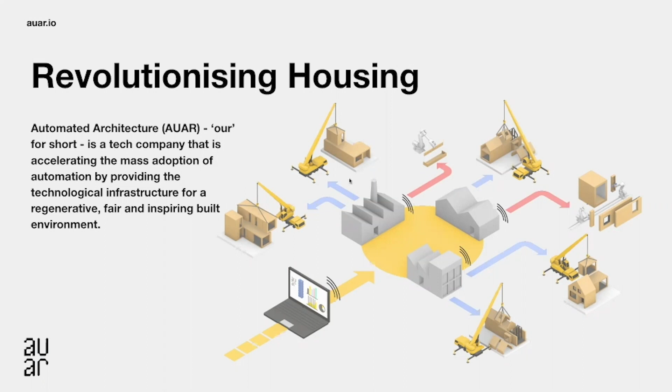Our team is comprised of myself and Gilles Retsin as co-founders of AUAR and of AUAR Labs, and we are supported by Ivo Tedbury, who's the ex-CEO of Sembler, a modular robotics startup, and Kevin Sai, who is our timber innovation modular systems expert, and he works across our technology stack at AUAR. And beyond us four, there are 6 other individuals that work with us: architects, engineers, developers, activists, and builders.

And sorry. So I'm just going back.

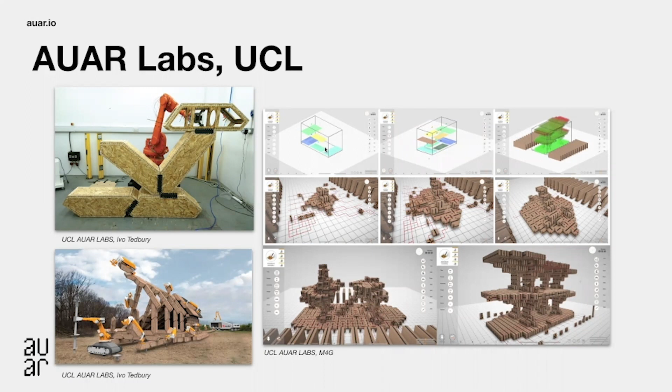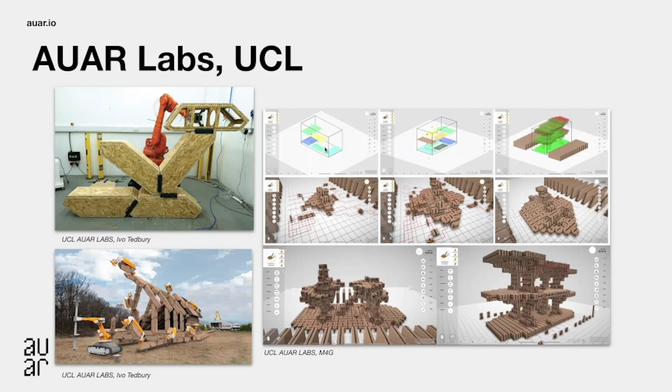So in our labs at UCL, we have explored for many years the intersection between design and manufacturing. We've done that both through speculative work around the way in which we can more closely bring together design techniques and simulations to design fabrication and robotics. We also have done this by testing. For example, in the lab, we have directly mirrored all of our simulation-based work and work with AI and used that as a way to analyze and understand how this can transcend into the building space.

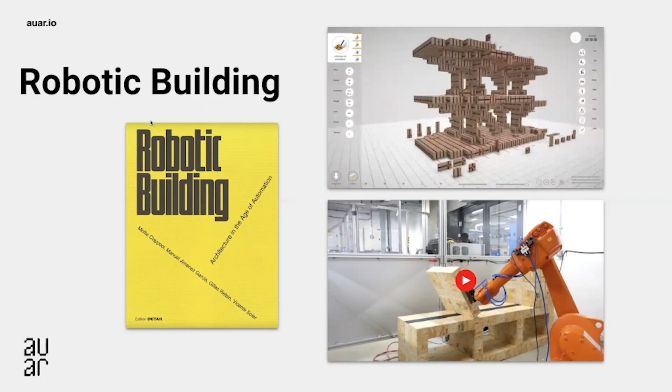We looked at this in more depth in our book, Robotic Building, which was published in 2019, and has sort of laid the groundwork, I would say, for our work in AUAR since then, really trying to understand how we can best use automated tools and technologies to further a mission that's really focused around more just built environments.

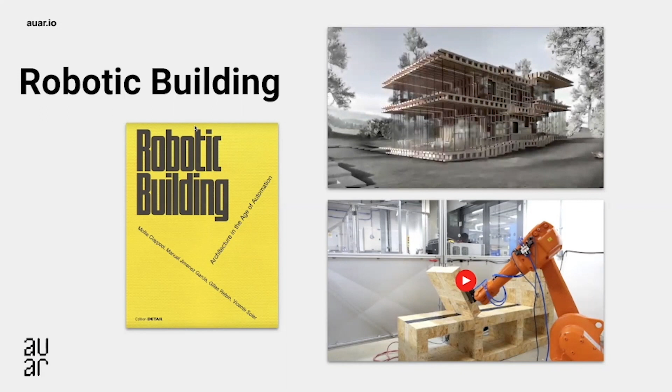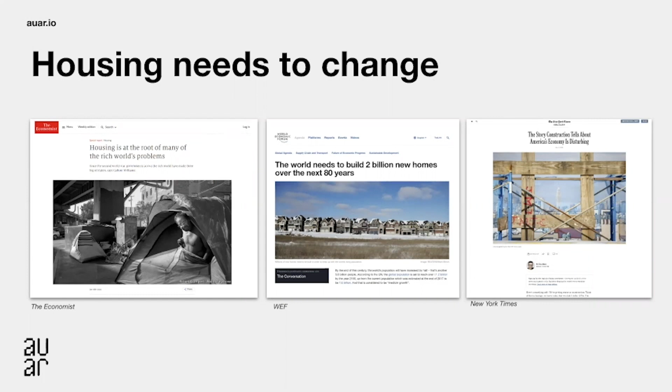So the baseline of our work is that housing needs to change. We know that we need to build many homes over the next 80 years, particularly in developing countries. But we also know that there's a very dangerous story being told around the housing crisis, in that we, as an industry in construction, are really unable to deliver on these needs because of intrinsic problems within the industry itself.

We put people on the moon, but we have really lacked the radical imagination that's needed to do things differently. And we believe that in order to change the way that we live, we need to be able to change the way that we build. This is really indicated by construction being one of the least automated industries in the world, and it has stagnated really since 1947 in terms of its productivity.

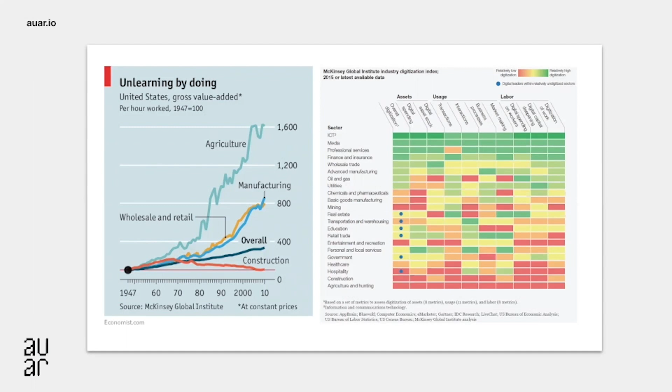When we look at some of the solutions that are out there, particularly in the construction startup space, we see that those solutions really mimic the existing supply chain. So there's a very fragmented approach to the way that a lot of these solutions are being implemented, because there's not a holistic view being taken of how we begin to address this problem. And we see also that attempts to solve it all by vertically integrating have also failed us for a long time and are continuing to fail us.

The very famous example in the US is Katerra, which was a SoftBank-backed startup that achieved unicorn status, took over $2 billion in investment, and filed for bankruptcy last year. And then, for example, a very famous business, Urban Splash, had a modular spinoff called House by Urban Splash, which fell into administration last year as well.

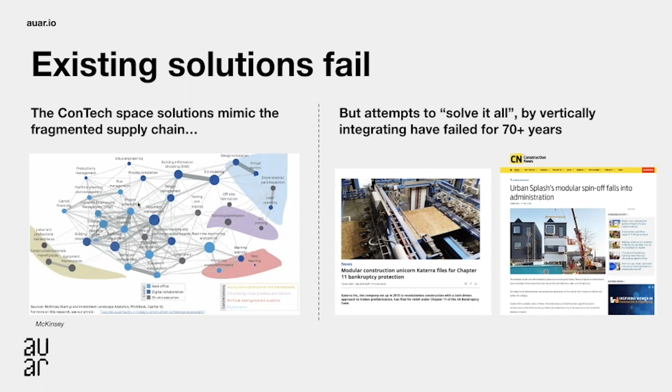So we see these kinds of crises happening when you start to try to vertically integrate and bring all of these things together under one umbrella. Actually, they're unable to do that because they're not integrating with some of the bigger questions in construction that we think we are able to address in our approach.

And we know that the building industry is really not like any other industry. We know, for example, that we are the only people that are making products that are always different, right? Housing, for example, is very localized. Building is localized.

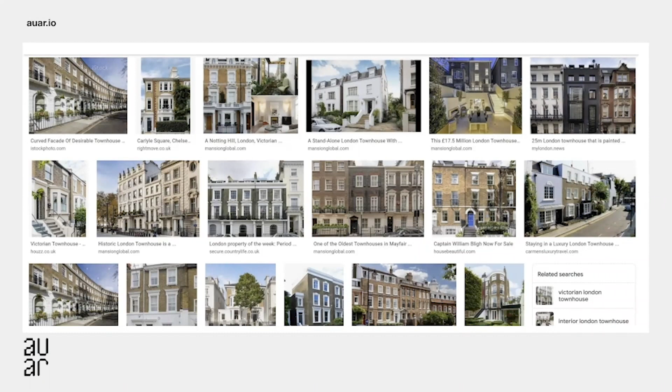So if a building is good, we've asked ourselves, why not repeat it 1,000 times? And we've seen this happen before, like for example, in London, the Victorian era, we see that townhouse typology being repeated everywhere. So why can't we think radically enough to be able to do this again? But a house is not a car, right? It's not a phone. It's not a product that needs to be the same and only have certain aspects of that object being customized, like its color or whatever.

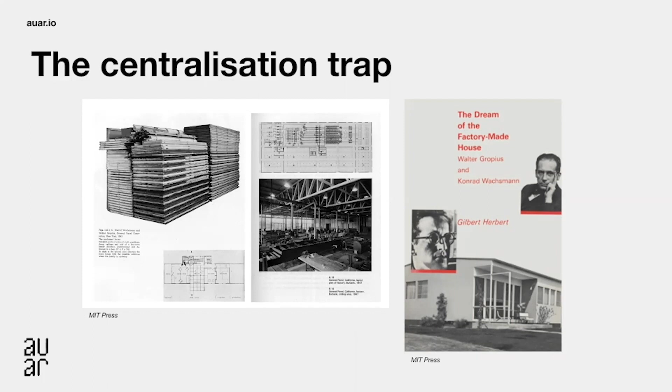And we also have fallen into a trap of centralization, that idea of vertical integration that I mentioned. You know, we know that one of the very first proposals around this was the idea of the factory-made house from Walter Gropius in the middle of the 20th century. And we see that centralization trap essentially mimics the existing industry averages. So for example, the industry average for a house is around 225,000 pounds.

And we see that the centralization trap that occurs really just increases the overheads by adding additional CapEx and only partially automates the design and engineering process as well as the labor process. And this means that other newer approaches that try to vertically integrate like Katerra, like Urban Splash, actually don't give any significant savings, both in terms of how that supply chain operates, but also in terms of costs.

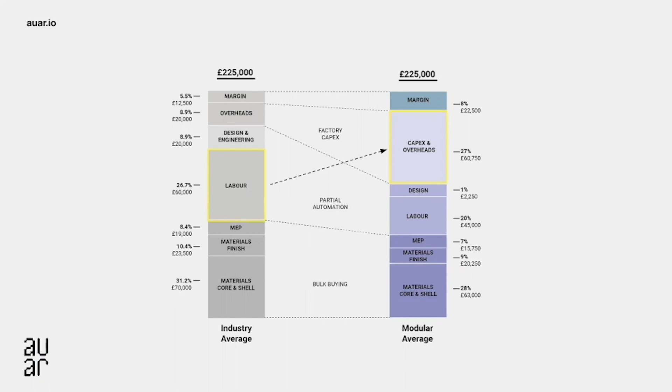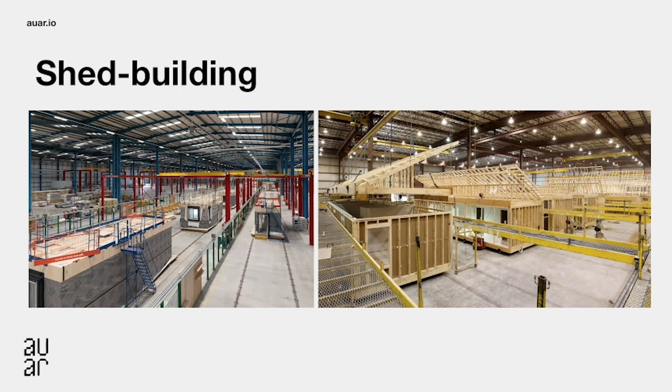Essentially, that labor, that big expensive chunk, just goes into CapEx and overheads. And these examples are essentially taking the construction industry and what happens on a building site and just putting them into a massive shed, right? And this means that all of those problems from the construction site still take place, but in that big shed. So where do we start in addressing this issue?

So in our approach, what we have done is we've looked at the value chain in the building industry and looked at the various stages of that value chain, from investment, development, design and engineering, manufacturing, construction, and maintenance. And we've looked at all of the other players and stakeholders that take on one of those various aspects in traditional industry. And then we've looked at some of the other modular builders like BoKlok, for example, which is a collaboration between Skanska, a global construction giant, and IKEA, or Legal and General, which also has a modular housing arm. Top Hat is another big name in the UK, and Katerra, which is now defunct. And we've seen that they actually try to take on too much of that value chain.

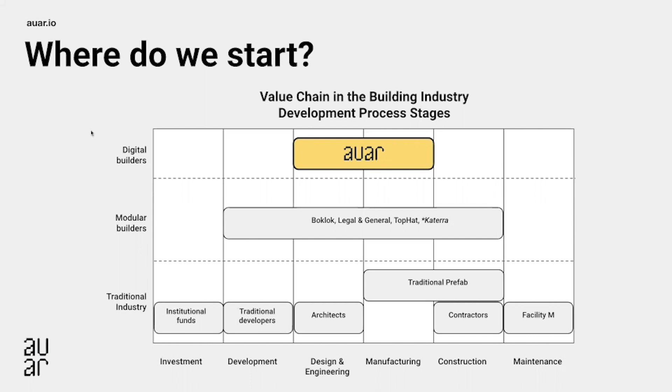So for us, we've really started as a digital builder in the design, engineering, and manufacturing space with the idea that that could have wide-ranging consequences for the rest of the value chain itself. So the building industry for us can't just be automated, because when we see that automation happening, it happens partially, it happens in a fragmented way, so it must entirely be reinvented.

So for digital builders like us, we've developed a repeatable but adaptable product. And that means that repetition enables us to have the basis for any automation, and that enables optimization and improvement over time. Adaptability is important because it allows us to adapt to different site constraints, different briefs, different regulations, and we can achieve difference in terms of adaptation at no extra cost. And we're developing a product because if it's so good, it needs to be repeated.

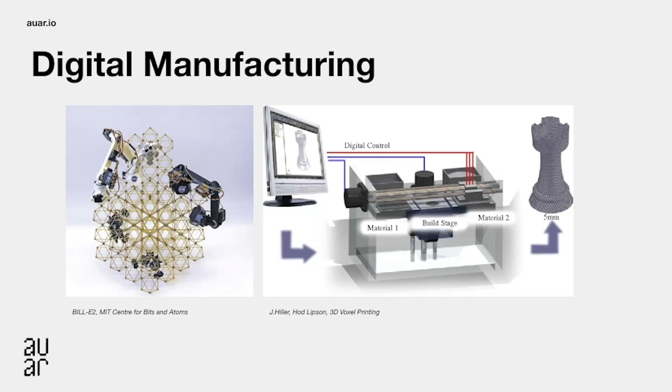One of the backgrounds here is thinking from digital manufacturing, for example, and the idea of a discrete element that comes out of MIT's Center for Bits and Atoms, where you have the same object being robotically manufactured over and over again to achieve many different varieties of ways of building different objects. So for example, for us, instead of thousands of parts that go into a building that mimic that existing supply chain, we've developed one building block that can be repeated in many different ways and allow for a great variety of adaptation or difference.

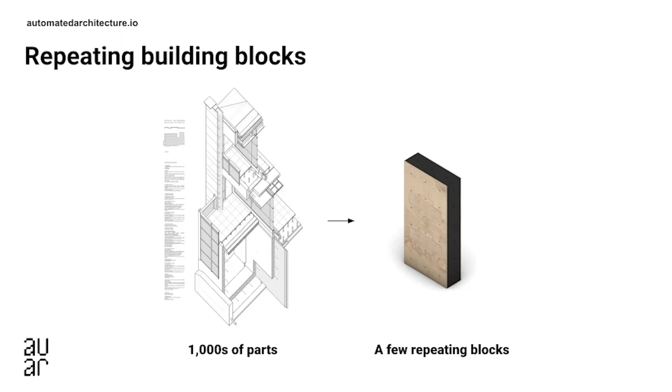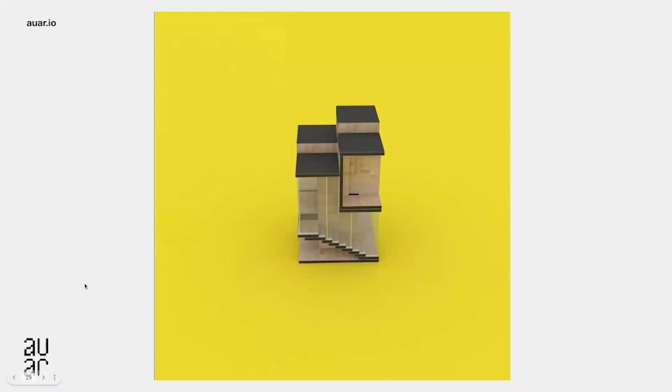This is where the discrete comes in and can be assembled together, as you can see here, in many different ways, allowing for different kinds of spatial typologies to emerge. And then also it enables us to really think about how that one block can not just be developed into one house, but also can provide the basis for lots of other different kinds of spaces to emerge out of it, or different kinds of interactions to happen with that building system for different uses.

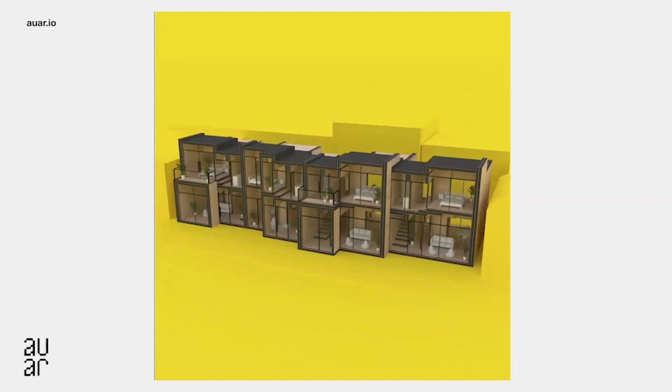And this is one GIF, for example, that we developed as part of a project in May 2021. I'll show it briefly towards the end of the presentation, where we see that we can actually engage this block to developing not just at the furniture scale, but also at a much larger scale as well for housing.

So in the company, we have, let's say, a 5-part element to what we're doing, and it's a circular process. So for example, we have a building system and a generator and digital supply chain model that feeds this process over and over again and really uses automation best to its ability, while also intersecting with known ways of working within the supply chain in terms of delivery. For example, in the way that buildings are assembled on site or in a factory kind of setup.

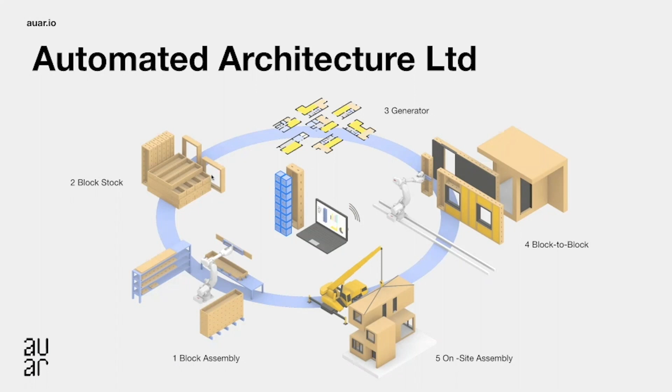And what this has enabled us to develop is a very local, low capital expense and low entry form of automation, where essentially you see our entire production line needing very few amounts of automation or different kinds of automation to be able to deliver any number of different kinds of homes. And this means that we can appeal to the building industry in a way that makes automation much more accessible to them, and thereby be able to work with many different stakeholders in that process rather than just one or two.

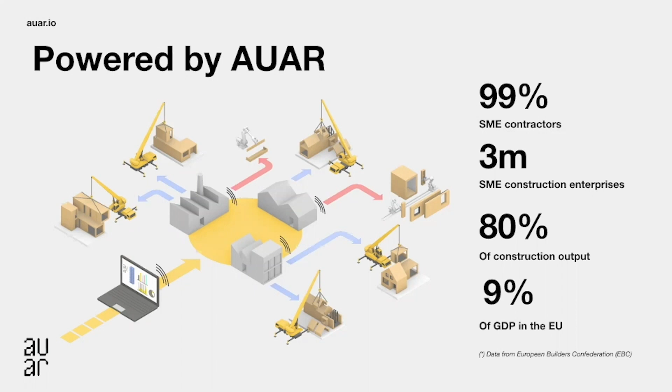So for example, what we have developed as an approach is that we essentially are powering an entire ecosystem of builders, particularly SME contractors, which make up in the UK and Europe 99% of all house builders. This means there's over 3 million SME construction enterprises with under 250 people, and the vast majority of those businesses are 1 to 2 people. They create 80% of all construction output, and in the EU, they comprise 9% of overall GDP, so this is a huge number of businesses that are very important in this industry that currently do not have access to automation, but they can gain access by working with our approach.

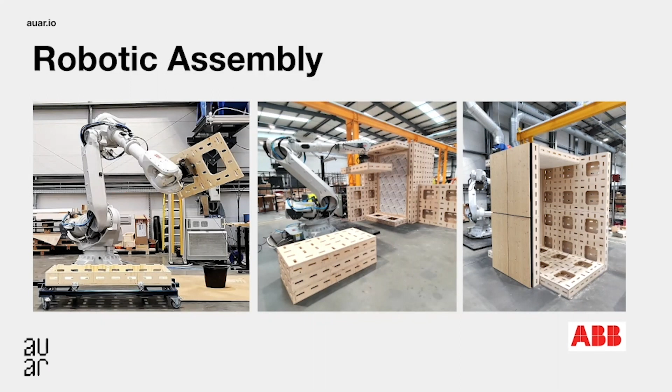This has also allowed us to go from robotic building to robotic assembly. So for example, we are able to use a very off-the-shelf industrial robotic arm, develop a modular, scalable and low-cost form of integration with that robotic arm that allows us to assemble our building blocks very quickly and then assemble them together to comprise different kinds of structures that then turn into homes. Our building system can be assembled in 45 seconds using our robotic platform.

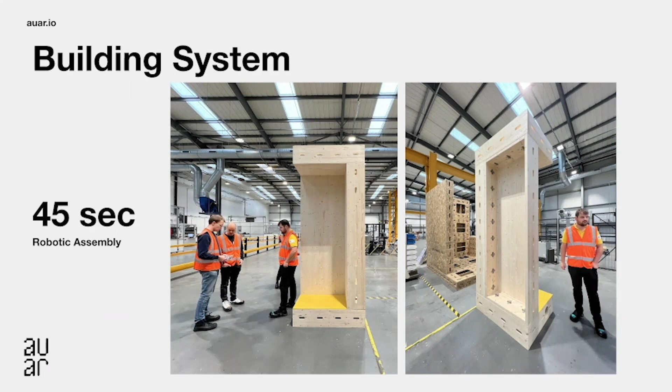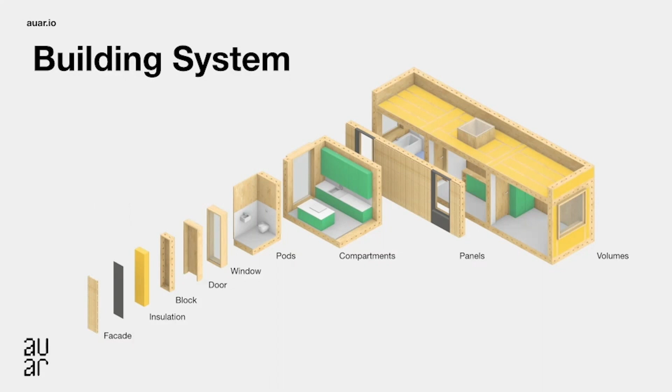This is an image of a couple of those building blocks combined together. This is a 2.7 meter tall unit that enables us to create an entire space. And this is the kind of integration that we're able to achieve. So for example, the block acts as a base unit for all aspects of, let's say, an entire volume. So it is integrated with the facade, but it also integrates the door, the window. It acts as the base for everything. It can make compartments, panels, and volumes, as well as all the integration with MEP and things like that that we need.

It also has provided us an opportunity to work with communities. So this is a really important part of onboarding stakeholders. So we've done a lot of work in the UK working very closely with communities to explore how automation can enable them to design and build their own homes and spaces. This project was Block West, which we did in 2020. There was an age group of 17 to 80 involved in the project, and it was 50% women and 50% men, which is obviously something that doesn't happen a lot within the construction industry, and is now really taking flight in the UK, with community-led housing groups that are using our tools and our approach to deliver houses locally.

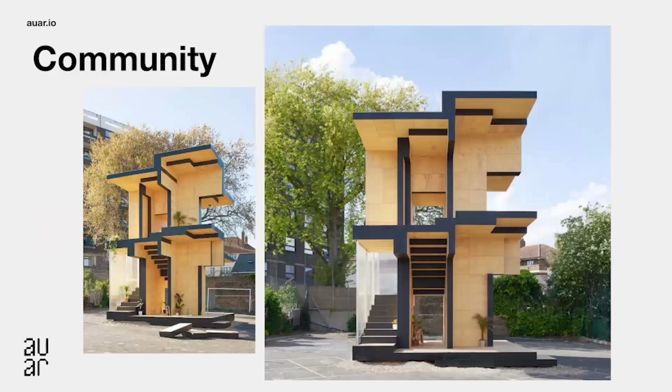We also did this in May 2021 with Hackney Council, which is a very large local government in East London, where we worked with local residents and community members, as well as policymakers and cultural institutions in that neighborhood, to design, build, deliver, and publicly program this project House Block, which acted as a kind of scaffolding for activity to engage the community.

So the project itself wasn't just an object that we built and then said, hey, look at this amazing thing, what do you think about it? We engaged people in a paid program of training and work experience in the design, construction, disassembly, and its activation as a public space, as a platform for these discussions to happen, as well as skills building and other forms of learning.

Just before COVID, we also built our very first office and residency space, which was an open space in the building center in central London. It acted as a co-working hub for over 6 weeks. And we were able to really explore the potential of how this kind of open-ended space could be used and also activated by the public.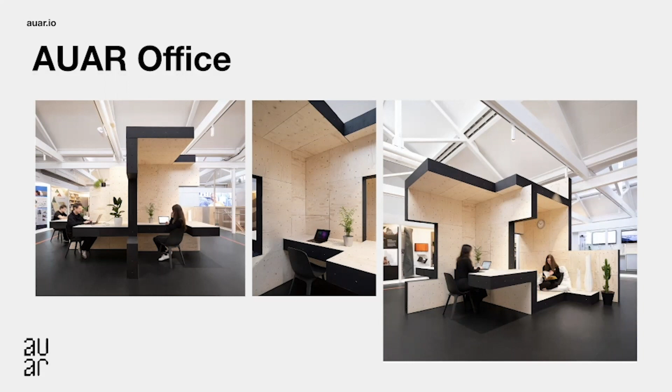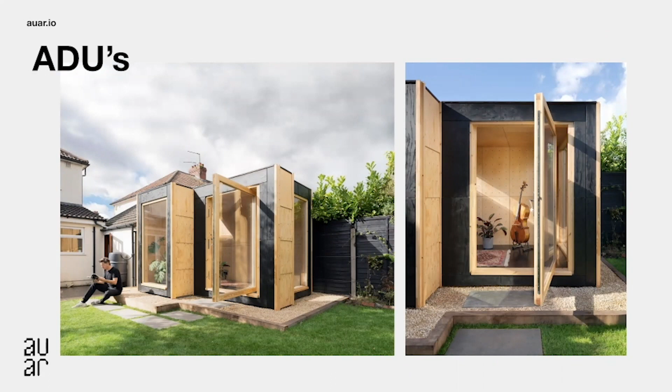Since then, we've built a number of different ADUs where we've been able to train ourselves, train our teams, train our robots, and really begin to understand how we could take away some of the pain of the contractors that ultimately we want to be working with our technologies. These were very fast-paced projects, and we learned a lot during this time. We're now starting to move away from this, but they're there, they're being lived in, they're being used on a daily basis, which we're really excited about.

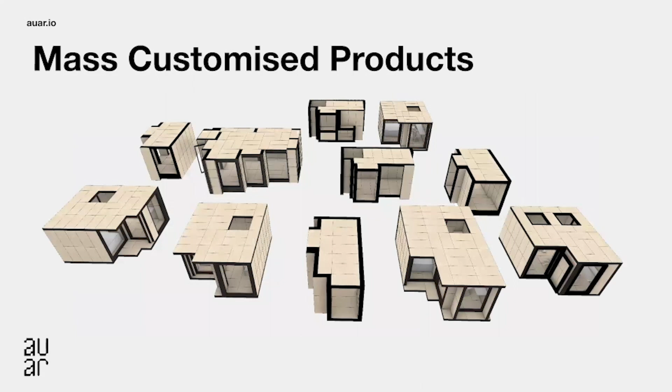So this moment for us was really big. It gave us this huge opportunity and platform to demonstrate what was really possible when you embed robotics in the production chain of how we design and deliver homes. And really, these are mass customized products. The mass customization trend of the early 90s and early 2000s really set a problem to the industry and to architecture, where it said that in order to get mass customization, you have to post-rationalize after the design phase in order for things to get built. And that really created a massive gap and increased the time and budgets of these projects.

So for us, we're looking at how can you get a standardized product that allows customization, and we've built or are building all of these small projects either last year or this year. And they're all exactly the same in a way, but they're all very different in terms of their use, their spatial arrangement and typology, and also their atmospheric qualities.

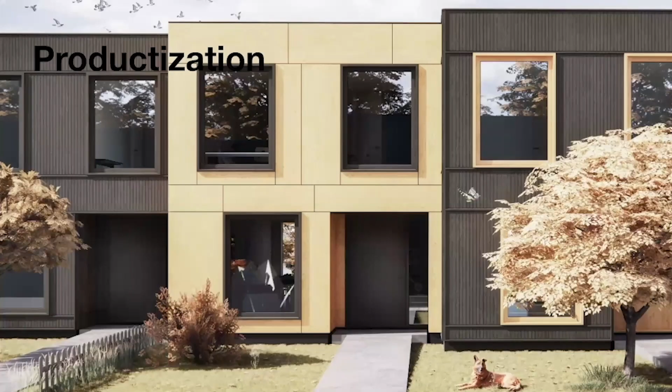We're now shifting again towards this notion of productization. We know that we have to make spaces that are incredible for people to live in. So we've developed a default house type that we launched actually yesterday at the Industrialized Construction Forum at Stanford, which is a house that can be adjusted to various different building regulation environments or contexts or sites, but without changing the design or manufacturing process that we use. So that means we can adapt to many different kinds of places without having to add additional cost or time. And it's beautiful, right? We can all agree. At least I probably want to live in one of these.

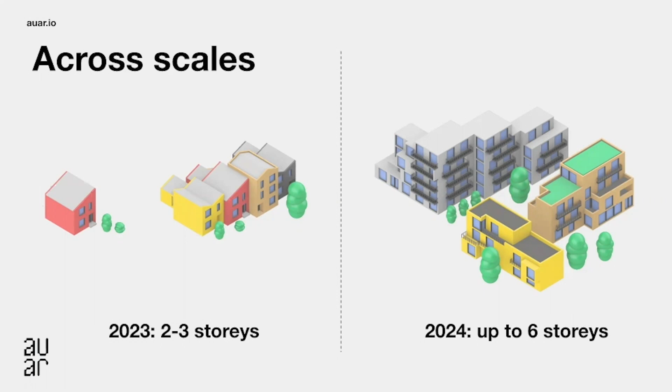So right now we're working across 2 to 3 stories, delivering houses in the UK and EU. And this is really a series of pilot projects that unlocks from 2024 onwards up to 6 stories of housing, which is really the sweet spot when you want to think about densifying cities or neighborhoods over the next 30 years to deal with issues around climate change in particular. So for example, this is one image that we created of what a community based on our building system might potentially look like when you have different densities and different house types developed there.

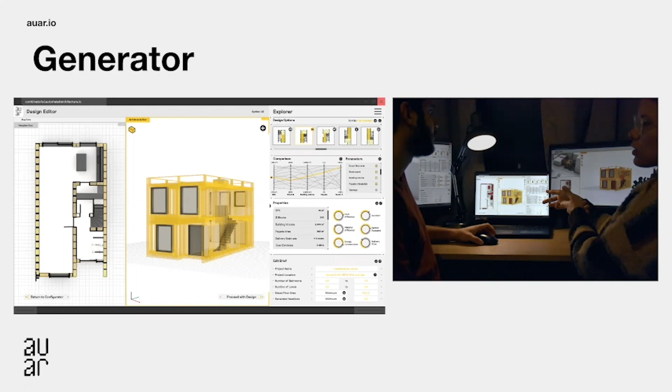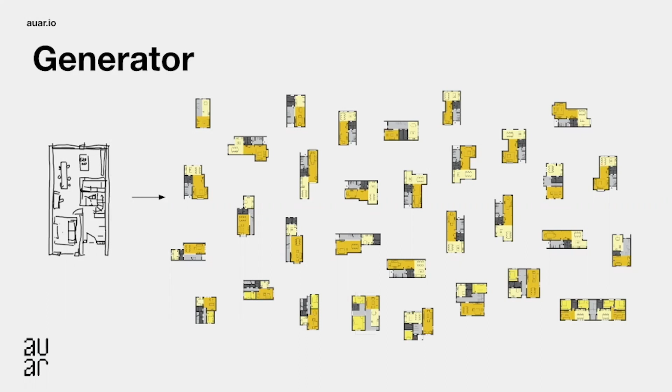So instead of developing a design platform that is, let's say, configuring known designs, we're working with the idea of the generator. This generator can take any kind of plan and generates what we call a block model from it. And then that block model gives us various different options in terms of what it might need in terms of customization, and that customization is automatically generated. It also automatically gives us all of the information that we need about a singular project. And that means that we can give very clear, automated and accurate costings and timelines for the projects that we're delivering. So this is kind of the dream scenario, which we're working on right now, where essentially you can take any sketch and generate various degrees of options automatically with our software platform.

So for example, these automations are very easy to quantify, because we have only one building block that we need to know everything about. So because we only have one building block, we're able to know all of the materials attached to that. We only have about 20 materials that we use to do one house. And we're able to control all of the robotic integration with it as well, which is a really interesting moment, we think, in simplifying and making an ultra short design and production chain.

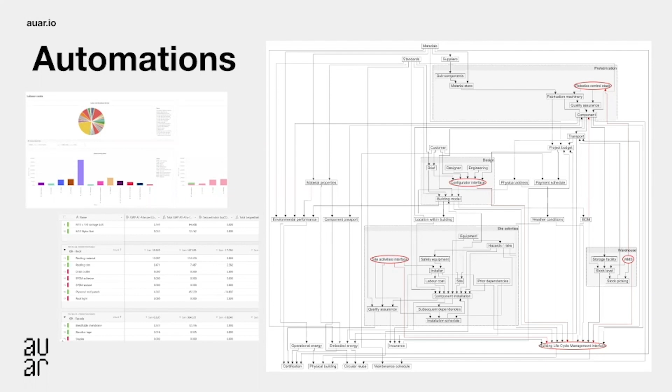We're also working on automations, very practical automations as part of this, in the form of apps. So this is one that we use with our more casual labor that we hire onto our projects in terms of delivery, where we have developed a tool that allows them to very quickly see all of the risks with a task that they need to do. It allows them to have access to all of the diagrams or images or plans that they need in order to do the assembly on site.

And it also allows us to track how they are finding the tasks that they're doing, and also provide us with feedback so that we can improve on our processes iteratively and not lose any of the knowledge that's created in one project once that project is finished.

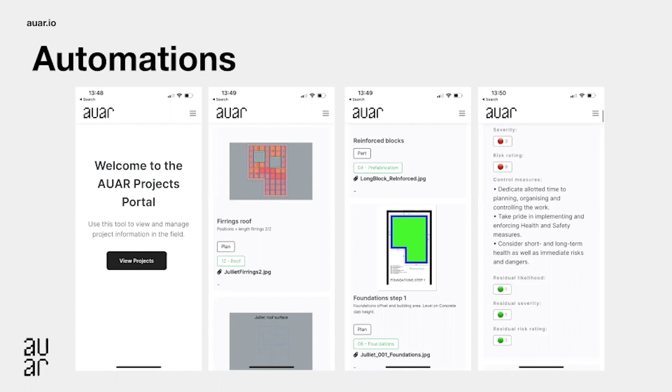So this all comes together in what we're calling a Microfactory platform, which is a very low capital expense platform. Our closest competitor is Cuby Technologies. Their Microfactory platform costs between £5 to £7 million. Ours costs between £300,000 and £700,000, which is a significant cost reduction in terms of having that low threshold access to automation. And it's modular.

So essentially, if you have an area where you need to develop homes where the numbers are bigger, you can just copy and paste and modularize the factory so that it can have a greater capacity. And because it is also modular, if, for example, you set up an area where you have 200 or 300 homes and that project's finished, we can very easily take down that factory, absorb it back into our network, and set up again in another location and expand the setup somewhere else where it's most needed.

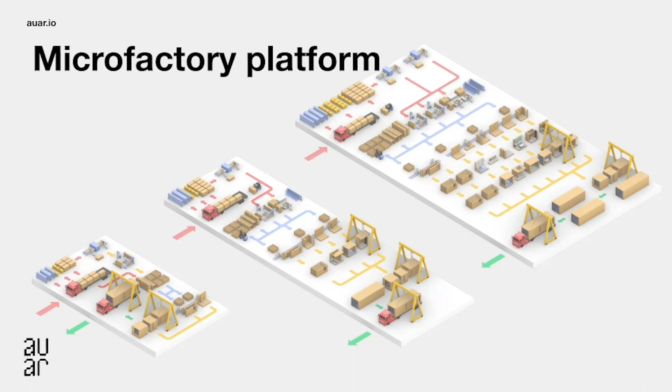It also allows us to do what we call parallelisation. So in a typical factory setup, you have the Ford model of the assembly line, where you have very codependent processes. So you can't move on to the next stage until you finish the first stage. And this creates a really difficult thing if, for example, one part of that chain doesn't get completed, right? It can really impact on the overall performance of the factory itself.

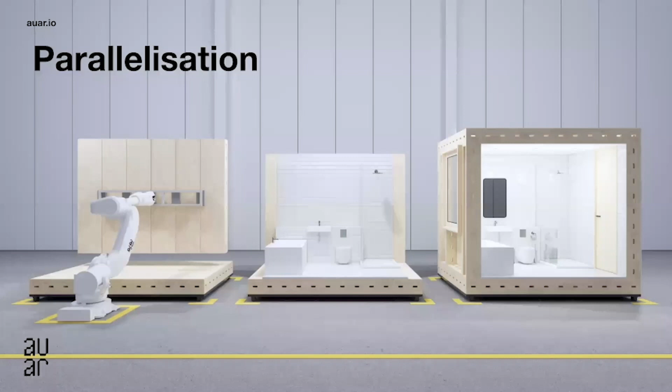So instead we have several different processes that can take place in parallel. So one robot can be assembling blocks, one can be assembling a bathroom pod unit, one can be assembling walls, one can be assembling the full volume. And no part of that is dependent on another part having taken place. So we design our projects with that in mind, and we can automate our supply chain really easily because of this. As you can see here, you can have these kind of 3 different stages. This is just a bathroom pod being finished.

This is our microfactory space that we're setting up currently in East London. We had been working for the last 18 months at ABB Robotics UK headquarters, where we were the only startup that had a robot cell in their innovation center. And we're now transferring that setup to our space in East London, where we'll be delivering a whole huge pipeline of projects in 2023, 2024.

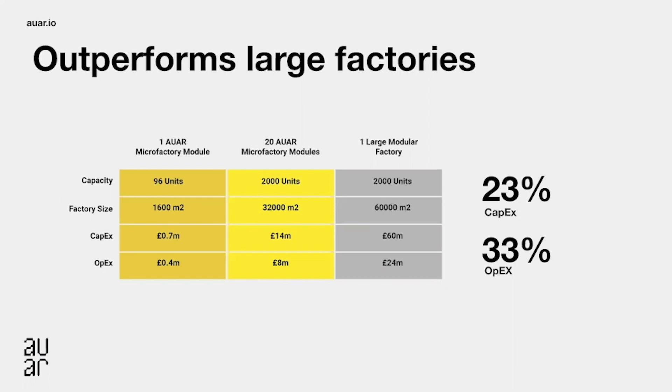It also has this kind of impact. You'll remember from earlier on my diagrams around the industry average and modular average. So with us, we're able to shift the amount of labor into CapEx and automation, and then increase the amount of margin that our contracting partners and delivery partners get, while also reducing costs significantly.

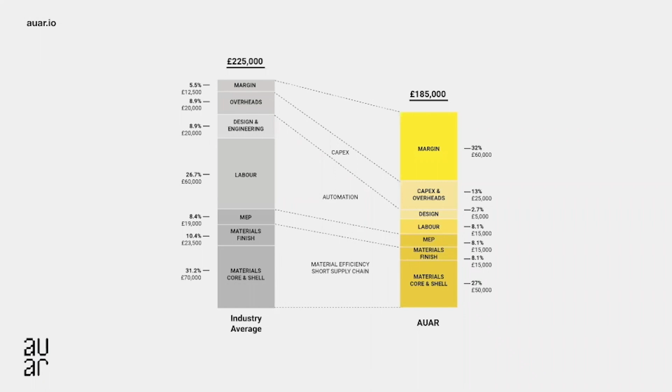This also has a big impact in terms of build time. The industry average for a house is about 36 weeks. We're able to go from design to site install within 6 weeks. In terms of energy costs per year, this is also hugely significant: because our building system already meets passive house accreditations, we're able to have significant savings in heating costs, which is obviously a really big topic right now in the UK, where we have an energy crisis and costs are extremely high.

And it also has a big impact in terms of carbon emissions. So each individual house, instead of creating 100 tons of CO2, has -12 tons of CO2 per house.

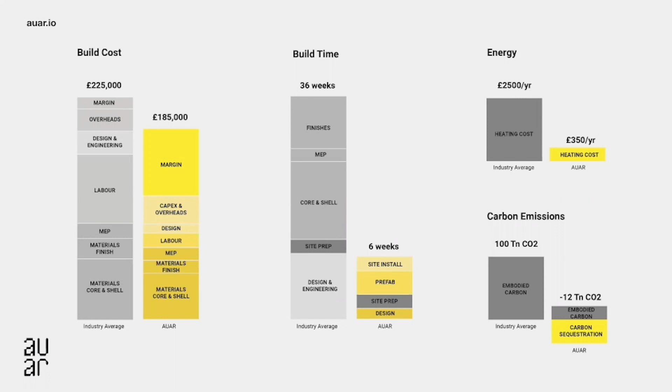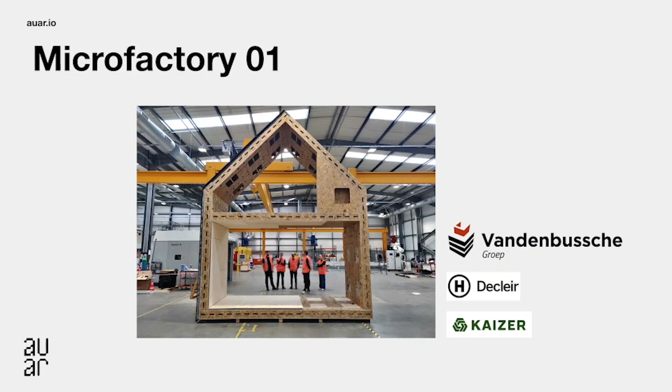So our first external microfactory, since we have our own in East London, we're setting up in parallel in Belgium, where we have a large pipeline with a large contracting partner with around a 250 million pound turnover called Vandenbussche. They do a lot of different things, but they also do their own housing development. And from that, we are onboarding 2 additional smaller contractors, such as Decleir and Kaizer, who are onboarding themselves as manufacturing and contracting partners, working with our building system and technology.

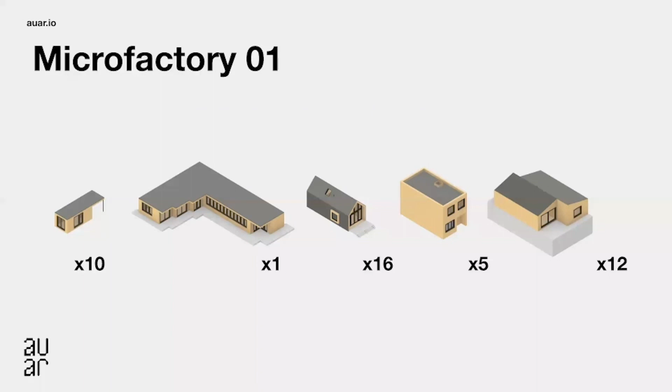This year, we have a really huge amount of projects. We're doing 10 small ADUs, 1 large test case villa, 16 small single family homes, 5 single family homes, and then 12 units, called uptopping in Belgium, which are essentially 12 units that go on top of an existing building that's being refurbished and retrofitted.

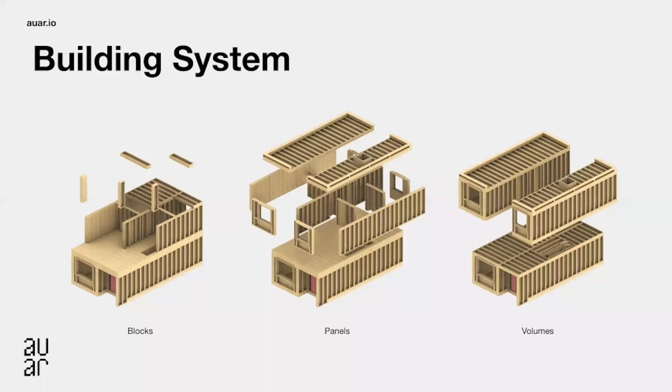Our building system is in a way agnostic to the way in which it's delivered. It can be delivered block by block, as panels, or as full volumes. This means that we can work across more different sites and site constraints than any other building system out there. And that has wide-ranging consequences for us to be able to work in many different regions at the same time. It allows the scalability that we need to deliver the kinds of homes we need globally.

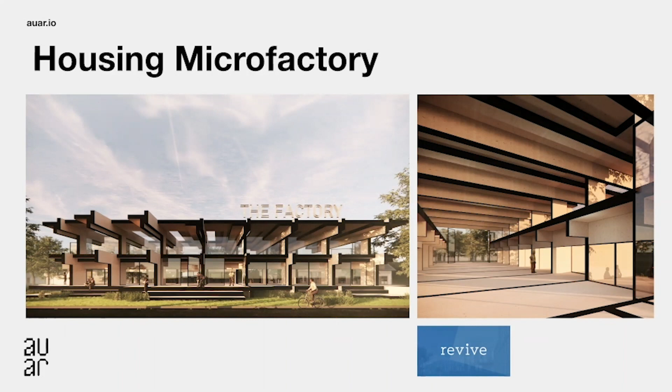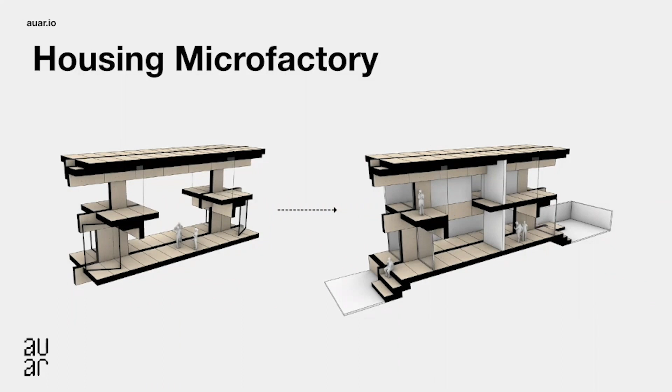And it's also allowed us to explore developing a typology for projects that first is a microfactory and then turns into housing. This is a project we're doing next year with Revive, one of the top 10 sustainable developers in Europe. They develop primarily on brownfield sites, where we have the microfactory setup that then delivers the homes itself. This is an example of how the factory then gets slightly retrofitted using the building system to turn into homes after the project is completed. Just a couple of images from that project.

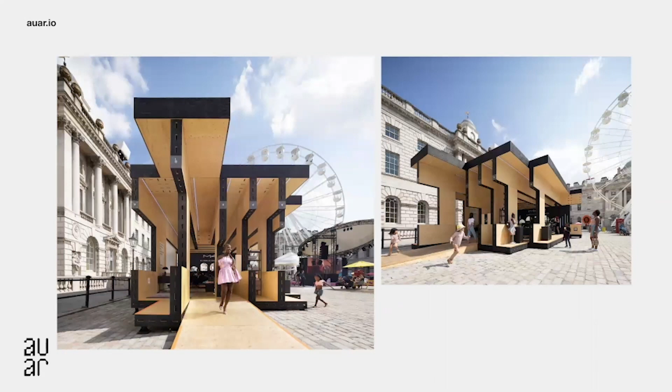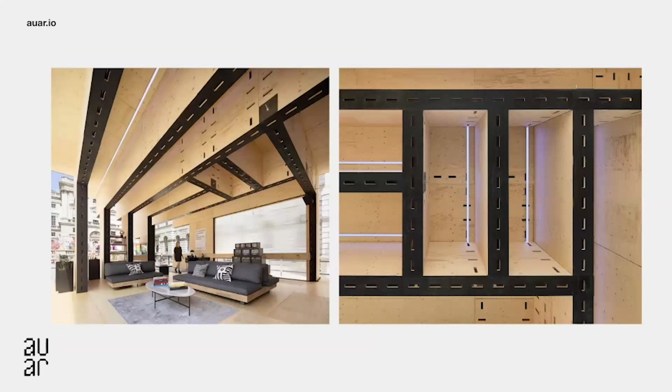And we're always testing this. For example, we built a small section of that microfactory earlier this year. This was a community-led project in central London, sponsored by the Mayor of London, at a cultural organization and arts institute called Somerset House. We tested out how we would build that section, and we use opportunities like this to further the practical R&D needed for large-scale projects further down the line. So that's an example of what that might look like.

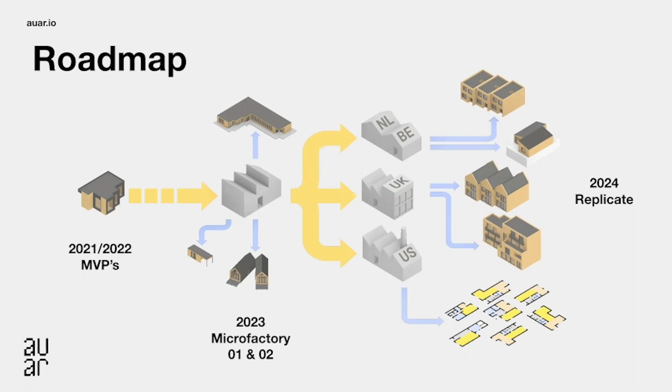This was our first moment going from a smaller scale block to a much larger scale block suitable for going higher than 2 stories. Our roadmap right now: in 2021 and 2022, we developed those ADUs as MVPs. This year, we're opening Microfactory 1 and 2. Through those processes, we're proving and validating our approach in the US, the UK, and the Benelux area of Europe, so that from 2024 onwards, we can replicate it worldwide. We're at a very exciting stage right now.

So yeah, we're working towards a network of 1,000 microfactories by 2030. That's just over 3,000 robots, and the capacity that gives us is 50,000 homes a year.

And that's just a drop in the ocean for the amount of homes that are needed and for how we might, we don't know, right? We know that we need billions of homes. So we're hoping that by doing this work, we're having a large impact in the way that this industry might approach this problem, but we recognize that it's still just a small amount that's actually needed.

But what we'll be able to save in terms of embodied emission per year is 4.8 million tons of CO2 per year if we were able to achieve this goal.